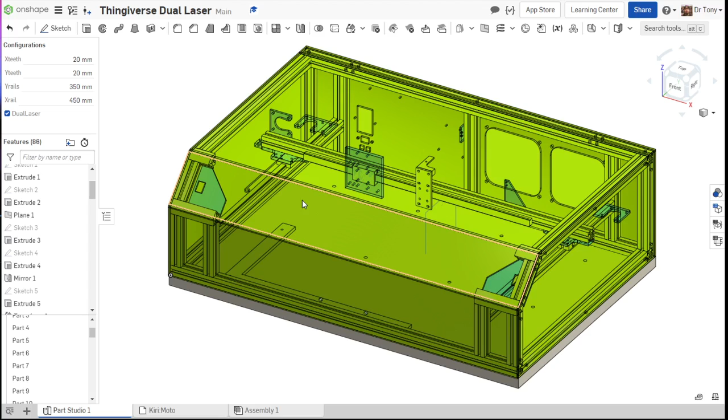So first I'm going to select the lid here, right click and hide it. I should probably hide a couple of these parts too. Okay, now I've got the most important parts here.

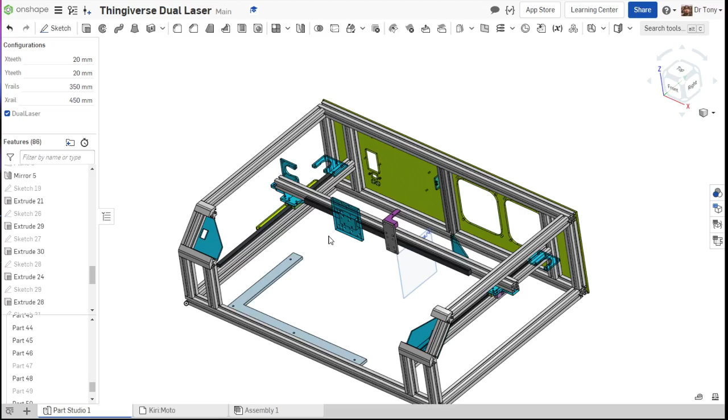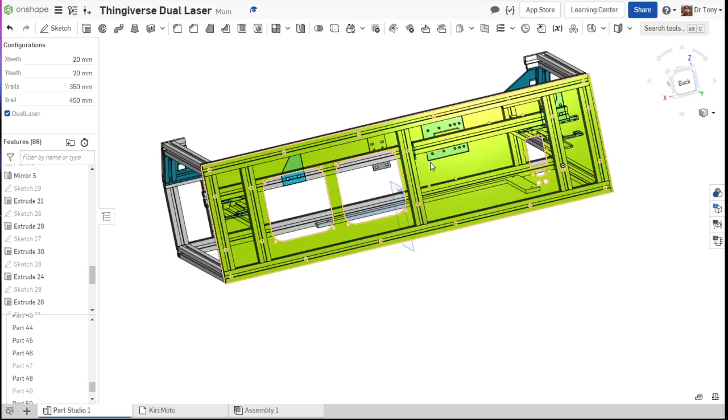So we have in purple the parts that need to be 3D printed. These are specialty parts that have to be 3D printed. To mount all your electronics, they all mount to the back plate, so you're going to need to mount that. If you want to 3D print it, that's a big part to print, but I would suggest laser cutting this or milling it out of wood or plastic instead.

You don't need to see through this side. Right click on it. First of all, nothing's clicked, I'm clicking in the white space. If I do have things selected, you'll notice my mouse has a number next to it, meaning there's two things selected. I don't want that, so I click out here in the white space.

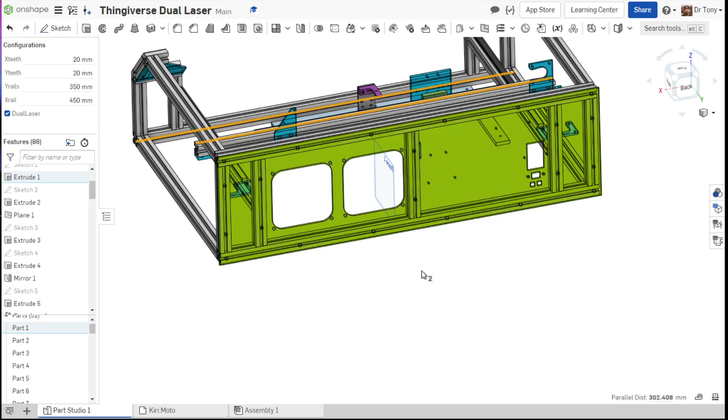I hover over this surface here - not this one, because hovering over this surface would pull out the wrong thing. I want to hover over this surface right here, which shows everything yellow, then right click on it.

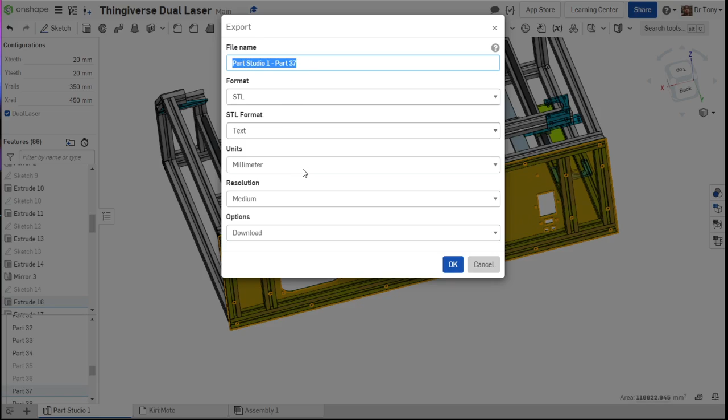If I'm going to 3D print this, I just want to export it. Export gives me some export options - chances are you want it as an STL in text format. Everything's in millimeters, and for resolution, you don't need anything more than medium. Then download and hit OK.

If I hit this, watch the bottom here - you'll see it's been downloaded. So that's just downloaded an STL of this. But I'm going to be doing mostly laser cutting, except for the purple parts.

So I'm going to right click on this, export as a DXF or DWG. I'm going to call this rear panel, bring it in as DXF release 14, and hit options to download.

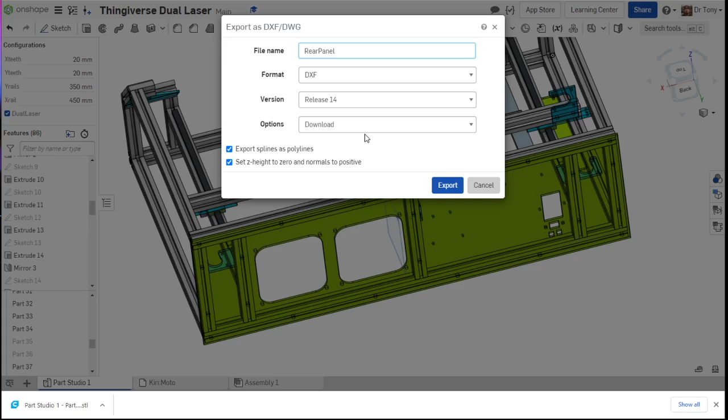If I have this all connected, I could send it straight to my Octoprint or Google Drive - Onshape's pretty cool about that. But I'm just going to download this here. Hit export, and there it is. So now I've got this downloaded.

So just to verify this, I'm going to open up Lightburn here, a popular laser cutting program. Trying to fit it in the screen nicely. I don't have anything set up, so it's going to be a little small here.

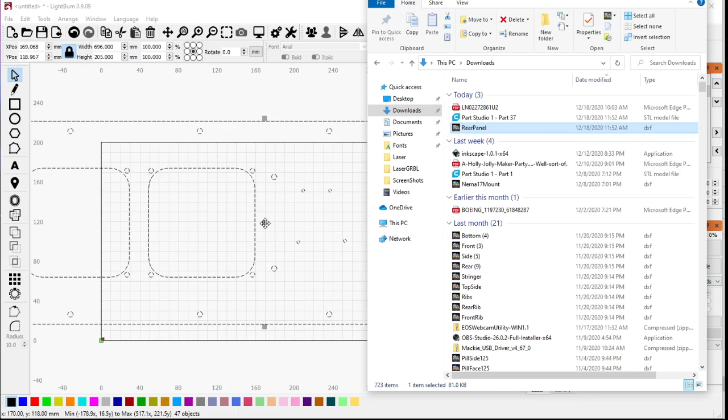I'm going to open up my folder under my downloads - File Explorer, go to Downloads, and there it is, a DXF of my rear panel. I'm just going to drag this in here. And there it is - it's about as wide and as tall as I wanted, and it had imported correctly.

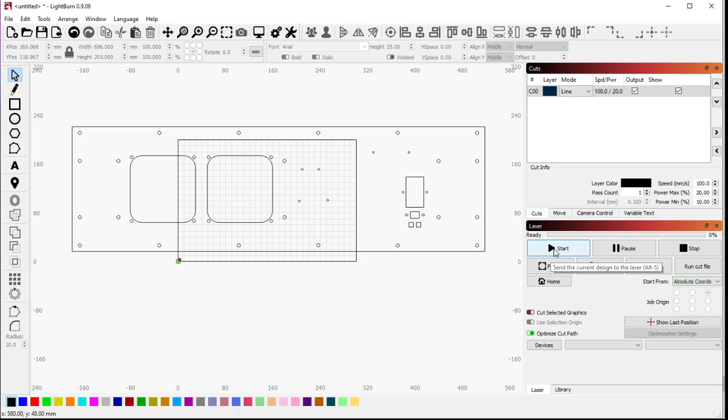Cool. So from here I would change my power settings, change my speed settings, and then start cutting this out on whatever piece of acrylic, wood, or whatever I wanted. Okay, I guess we could get even trickier here. I'll close this. So then we've got to cut this back panel out.

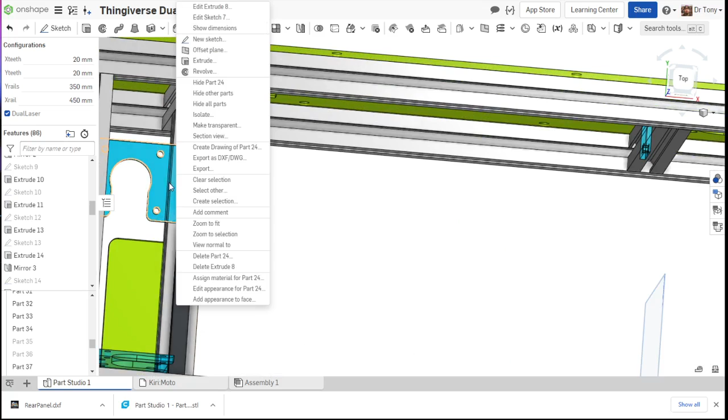We also got to get the Y-axis NEMA motor mounts out. So I'm going to right click on this one - that's Y NEMA left. Right click on this one, export as DXF - Y NEMA right.

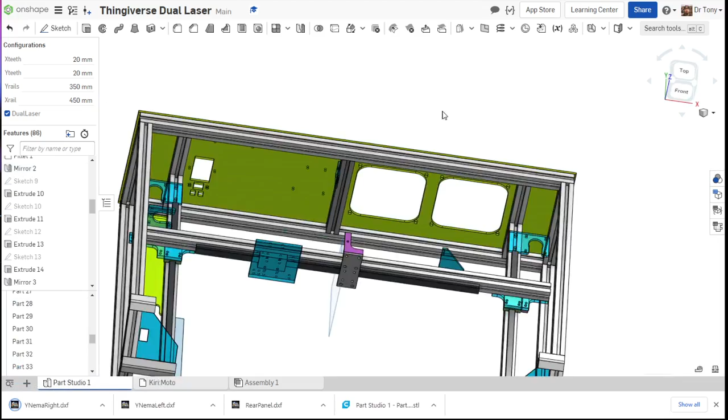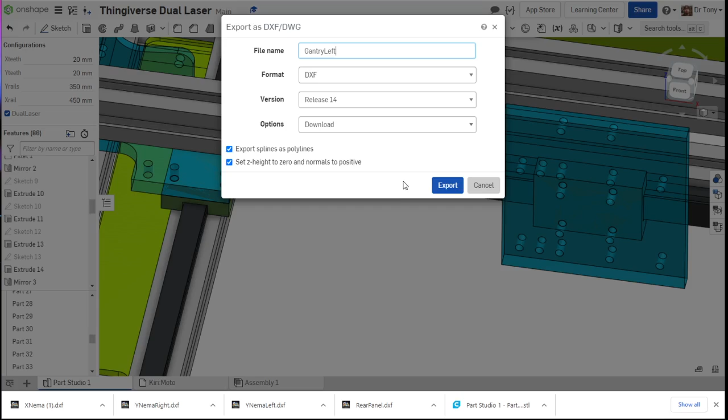Okay, then we have our X NEMA. And then we have our gantry brackets - export this as gantry left. Unselect that, right click on this, export this as gantry right.

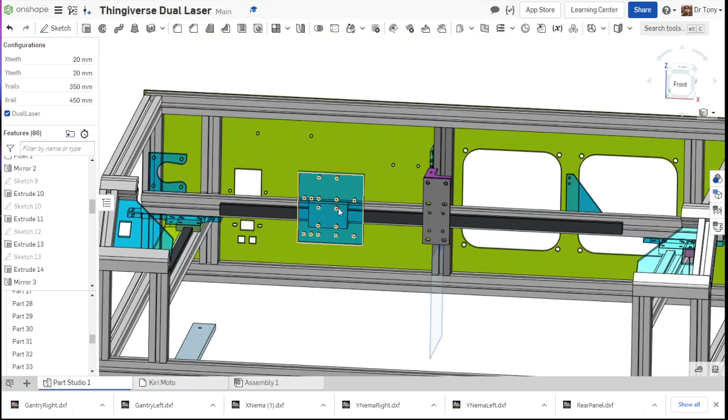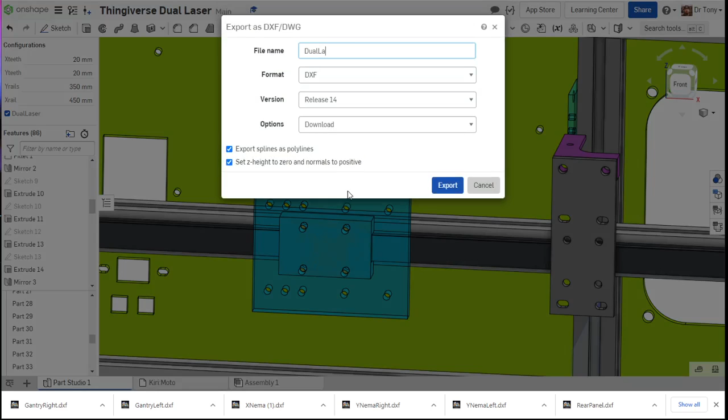And then, since I'm doing a dual laser, this is a single laser bracket here. With this one you can do really high speed moves, but just one laser. This one you're going to have to run a little slower if you have two lasers on here. I'm going to right click and export this as my dual laser bracket.

Cool, so what do we got here? We got the back, we got the gantry mounts, we got the motor mounts. What else do we need here?

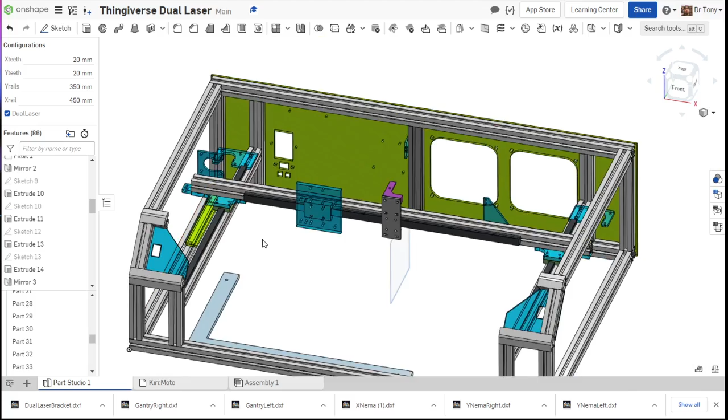Oh yes, a switch - to switch between lasers I put a switch right here. So we're going to right click on this and export this as laser switch. If you have a single laser, you do not need this bracket. And I got one on the other side, just in case you like to be symmetric.

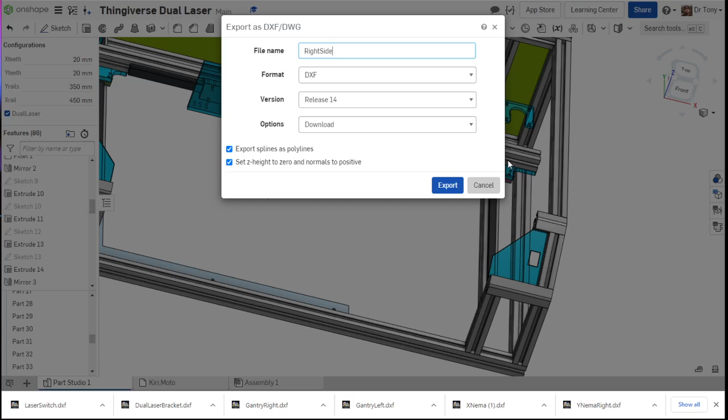And we can cut this hole out too, I'll show you that here also. So I'm going to right click, and export as right side filler - filler, sure, nice and spelled wrong.

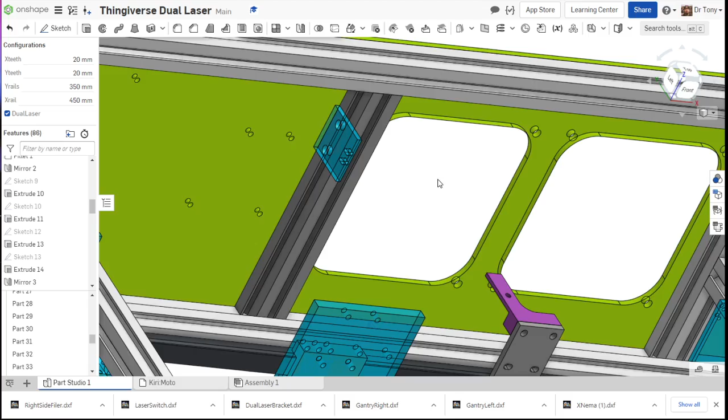Oh yes, we have two more things - we have the Y-axis end stop mount, so Y end stop. And then we have our X-axis end stop. There it is.

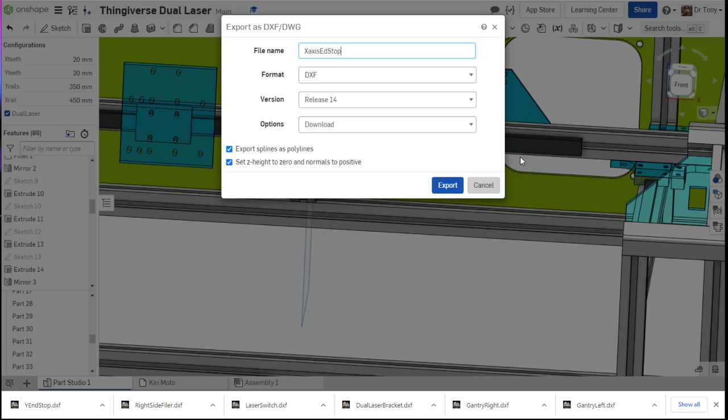X-axis end stop. Ed stop, sure. Okay, so here's one more very important part, our power supply mount. I guess we need to mount a power supply to this thing. Right click on this, export that. PS mount. Cool.

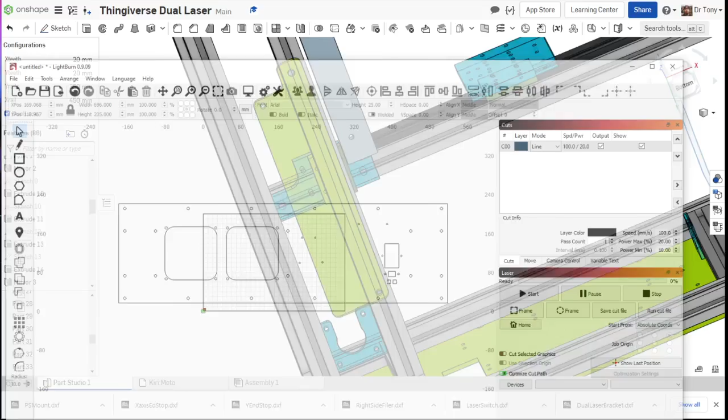Okay, so now we got a ton of parts, right? I'm not sure what software you're using, but I'm going to be using Lightburn on mine here. So this back piece I'm going to be doing at a quarter inch acrylic, which I'll also need to cut my NEMA mounts and my gantry brackets out of.

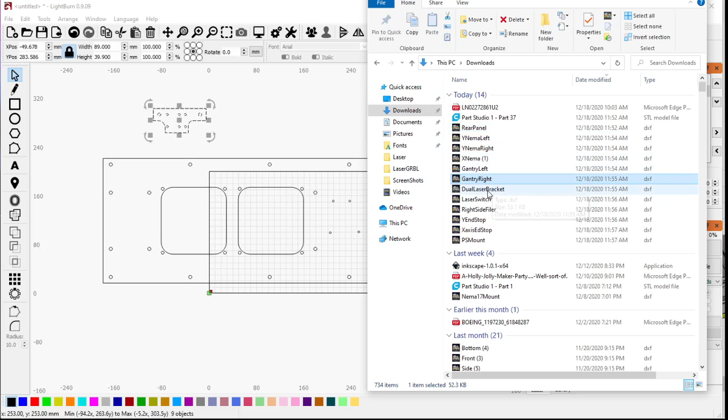So I can bring my gantry in here. My gantry left, I wonder if that'll fit in there. Oh yeah, it fits in there. Cool. I'm gonna group those so we don't mess them up there. Okay. Very cool.

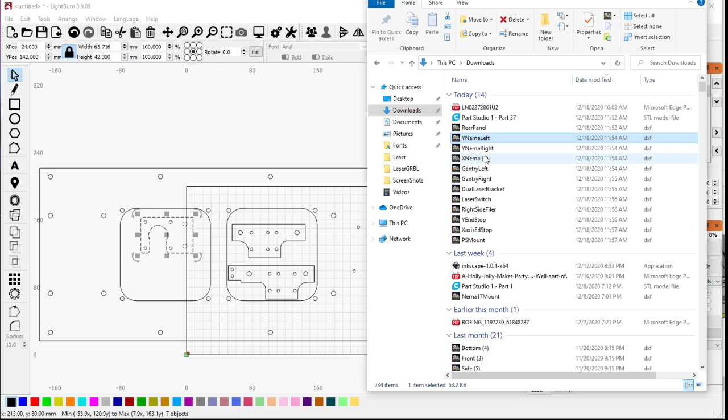And then I'll do the Y's. So Y NEMA left. And Y NEMA right. All right.

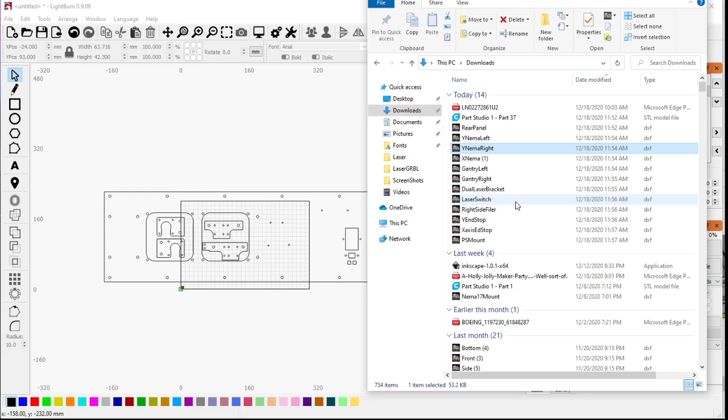So then I still need to cut some other pieces out. I guess I'll fit the x-axis to the side here. X NEMA. I don't want to cut it out of the backside. There we go. All right.

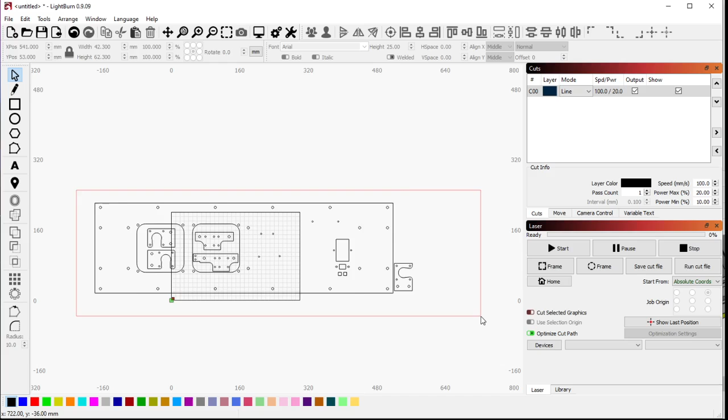So then I would have it cut this. I don't know what program you'll be using. I'm with SnoCo Makerspace in Everett, Washington, and we use LightBurn on our lasers. So this is a program we'll be using. So I'll cut all these parts out, right?

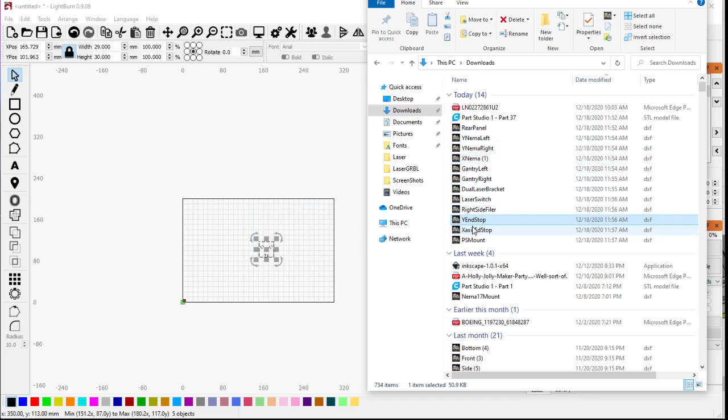And then out of thinner material, out of 1/8 inch material, I'll be cutting the other little pieces out. So I'll be cutting the Y end stop, the X end stop, and the power supply mount. Yeah, those are out of thinner material. They can also be out of thicker material, but it doesn't need it at all. You can just cut this out of 1/8 inch or 3mm material. Okay.

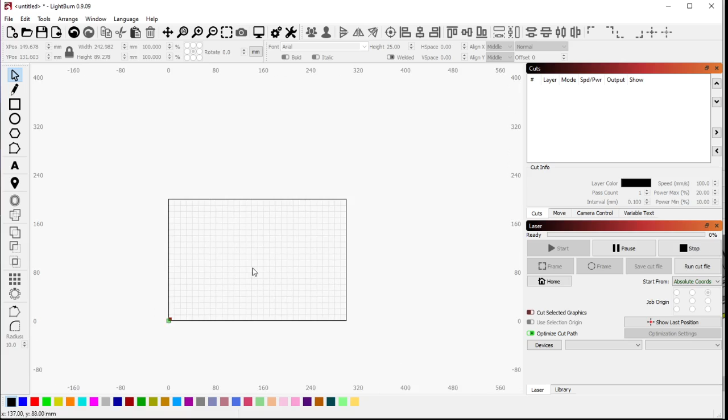So those are the necessary parts right there. Whoops, gotta bring that back. Okay, so the other parts, it would function like without all the sides and stuff here, right? It doesn't need that. It doesn't need the alignment tool. It doesn't need any of that. These are all the necessary parts to build this.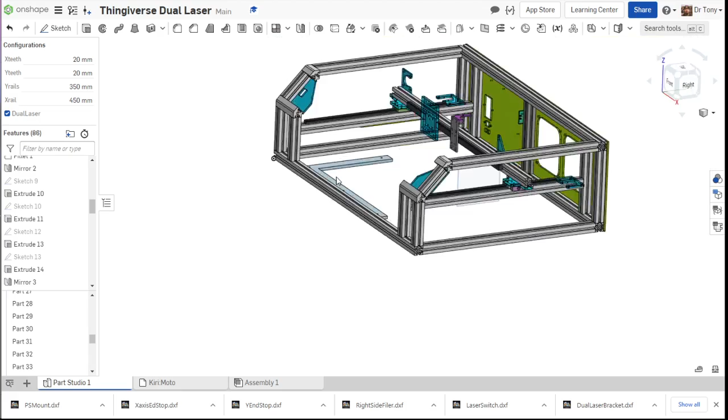But what I'm going to do is I'm going to bring everything back. So right click in white space and show all parts. Don't show all, because that's going to show all the drawings too. Just show all parts. Okay. So now this right side, I can export that, right? Export as, I guess that's the left side, huh? Left side.

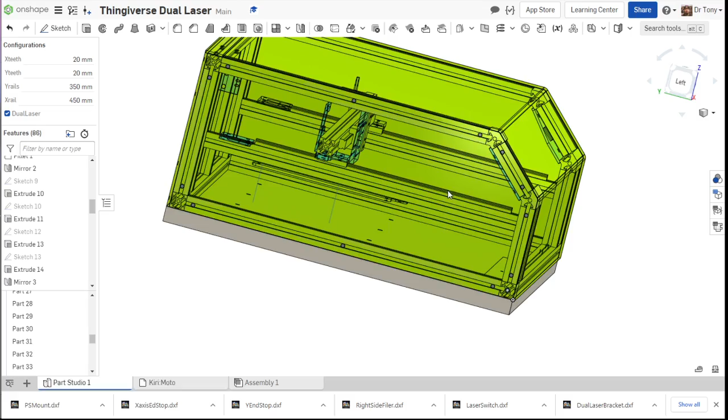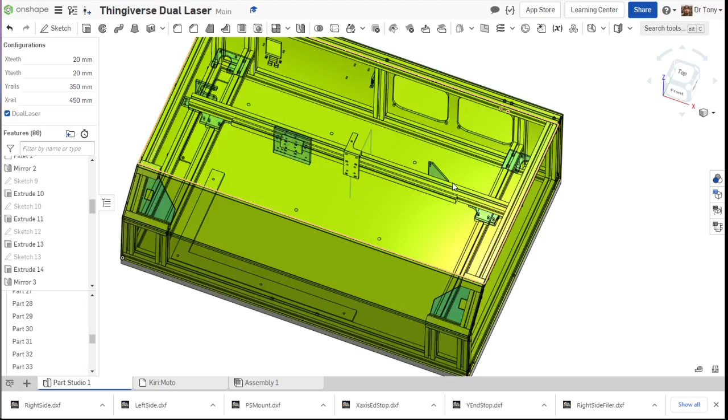Okay. Right click, export the right side. Now these have to be thinner, like the 3mm acrylic or 3mm wood or whatever you want. Okay, the rear panel is a quarter inch thick. Should be a quarter inch thick. I'll make sure it's that for your drawings when it's publicly available here.

Now this little piece right here has to be the same height as this, right? So typically use 3mm for the lid here. Okay, I guess if I select part 41, that's the whole lid piece. Now, if I were to take this and just click here and export, what it's going to do is, if you look at that yellow line that goes around it, that's all it's going to export. It's not going to bring out the whole lid.

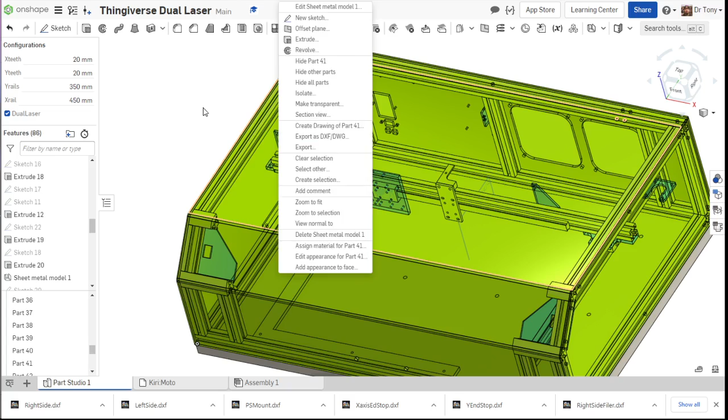Okay, so what I have to do is I have to go to my sheet metal view. Now, it's not actually sheet metal, it's acrylic, but it has similar bend properties to metals. So over here on the right, there's a sheet metal tab. Now from here, I can right click and export. So you'll see how as I'm scrolling over things, it's just yellowing around this piece right here, right? Until I get to export DXF of flat pattern. Now it's a whole thing.

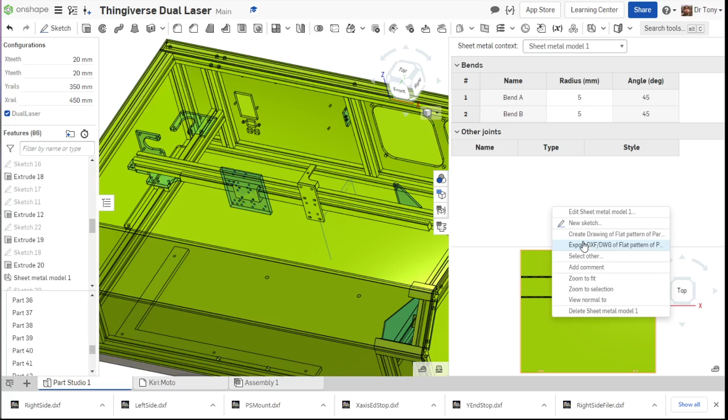So if I hit this, now I can do this and call it lid. Okay, so it's got a little bit of information in here. I'll show you that here. So I'm going to go back to my downloads and look for lid. There's lid, bring it in.

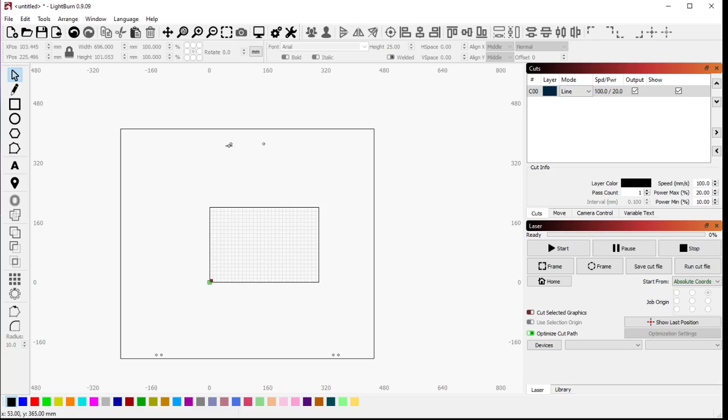Okay, so if I were to cut it right now, I'd be cutting the lid apart, right? I don't want to do that. So I can either delete these lines, because I just need the hinge holes and the handle holes up here. Or I can take these, make them a different layer and just do a scoring so I can easily line them up on my bender. Or I can follow it with my kitchen torch to bend it. I've done that too, that works just fine. It's just not as pretty as taking it to an actual heat bender and bending the acrylic lid.

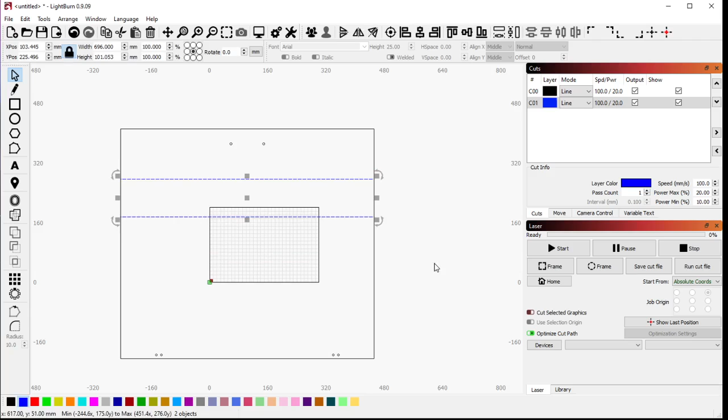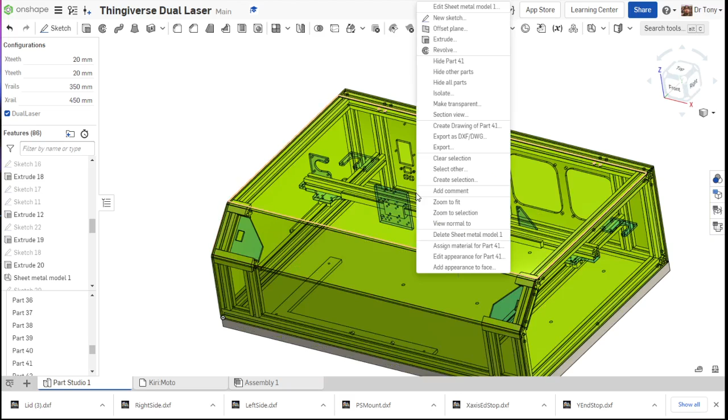Okay, so let's get back to... There we go. Okay, so close the sheet metal tab. That's how you export things, okay? So things are in your way right here, you right-click on them, hide them, and then all the brackets you need and the back panel. You right-click on the surface you want to export, and then you hit export as DXF, and then download them, and then open them up with your favorite laser tool and start cutting those out.